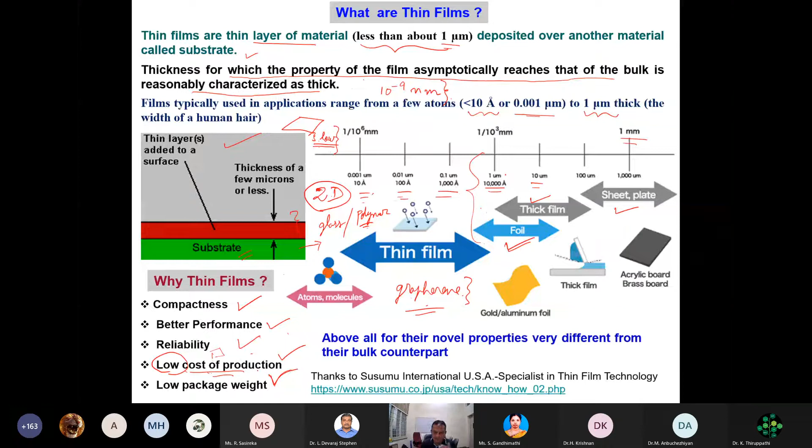For example, in your SIM card, I cannot have 2 mm thick gold. That means your SIM card becomes expensive, and people will try to pickpocket your SIM card also. So you have to have a low cost of production. So I should have a very thin layer of gold, but still it will serve our purpose. So in that manner it's called low cost of production, and obviously low packaging, because the thickness of the material is going to be scaled down. So the whole device will be very lightweight.

Okay. Now coming to how to form thin films. Can I melt it and cast it, or should I make it layer by layer? Several questions will come to mind. So there are 3 basic steps to form a thin film by physical vapor deposition, called PVD, or chemical vapor deposition, called CVD. You have to create the material in vapor form, then transport the material from the source towards the substrate, and then the film has to grow.

Why do we have to create the vapor? We will have a bulk material in our hand, so we create vapors by heating this material, and these vapors have to be reformed onto a substrate to the thickness we need for our application. So we create a vapor, transport it effectively towards a substrate, maybe a glass or something like that, and then grow it with a particular thickness and a particular property of interest onto the substrate.

So these 3 things are fundamental. Creation of the material in vapor form, by a chemical method or a physical method. Then you have to effectively transport the created vapors to the substrate, and then reform that material onto the substrate. So some of the steps for film formation are shown here.

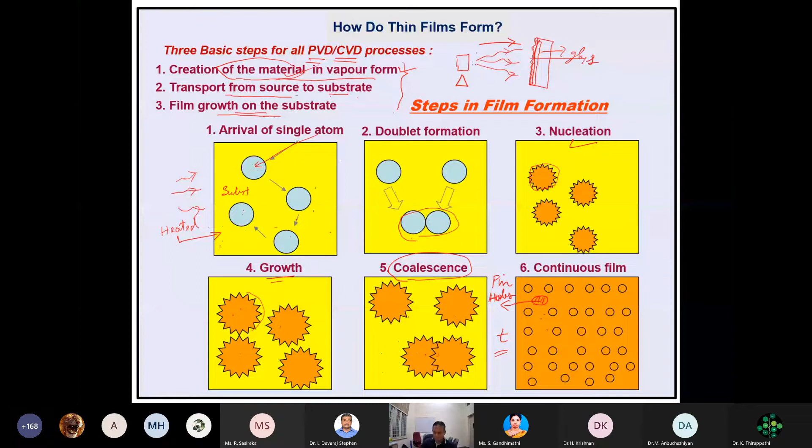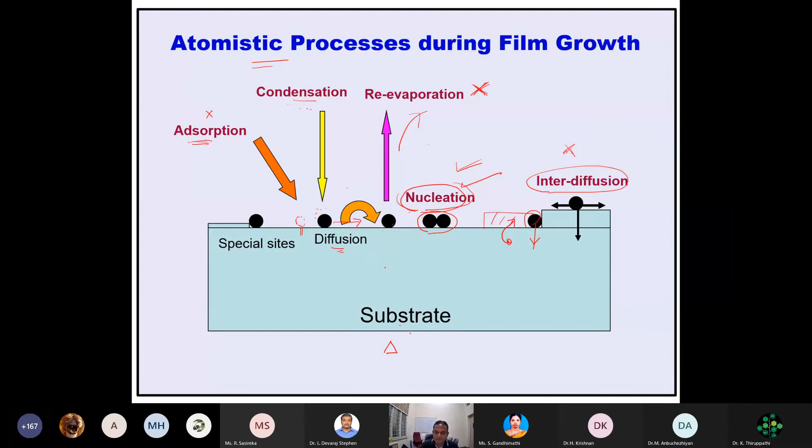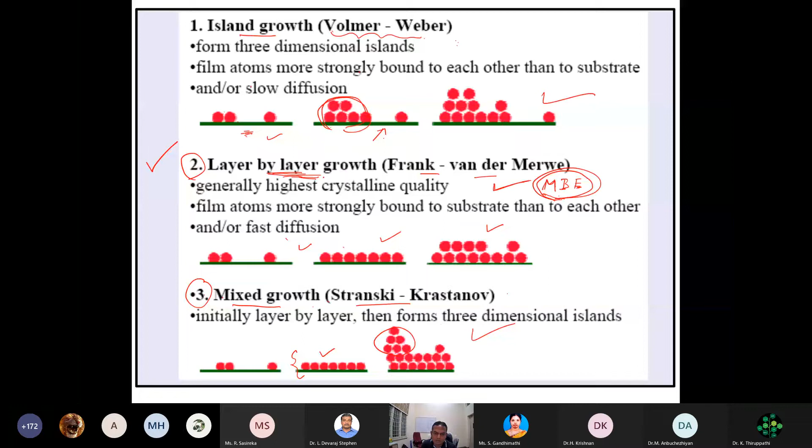So something like island growth mode or mixed growth mode, you will be ending up. If I want to have a layer by layer growth mode, to have an epitaxial film growth, I have to keep my rate of deposition very slow. But of course, it takes long time to deposit. But if you want to have a quality thin film, your rate of deposition should be very low. Okay, that is very, very important.

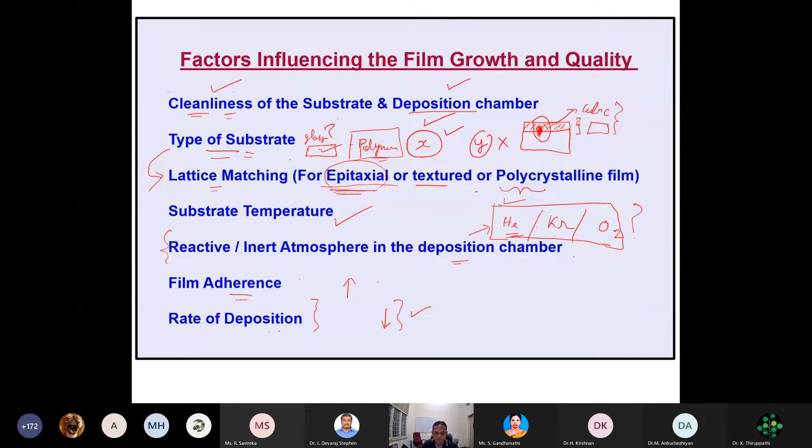And then coming to the cleaning process, how to clean the substrate. So first of all, you should decide what is a substrate, whether it is a glass or whether it is a polymer. Okay, so if it is a polymeric material, if I use strong acids, the substrate will be dissolved out. Okay, that should not happen. Or if I have a glass substrate, once again, I should not use a very much corrosive substance. If I use a very much corrosive substance, the surface will be etched out, and then the growth of the film may not happen properly.

So the substrate cleaning is not universal. You have to clean, but what are the steps to use for cleaning will vary depending upon what is your material or what is your substrate, all those things. So for now, I have given some set of procedure to clean that one. So you can see here, first I can take my glass substrate, put it in an ultrasonicator, okay, in a proper solvent in a container.

That is very important, because why I have to use an ultrasonicator means ultrasonicators will have frequency of the order of 20 kilohertz, right? So when they have 20 kilohertz frequency, you will see that at the bottom you will have a PZT crystal. Piezoelectric crystal will be there at the bottom. So when I'm going to oscillate this piezoelectric crystal at a very higher frequency in the range of ultrasound waves, you will see that inside this beaker where I have put my substrate along with a solvent, I cannot put it empty. I have to put some solvent here. So it will be creating bubbles. It will be creating a lot of bubbles at a rapid rate, of the order of ultrasonic frequency.

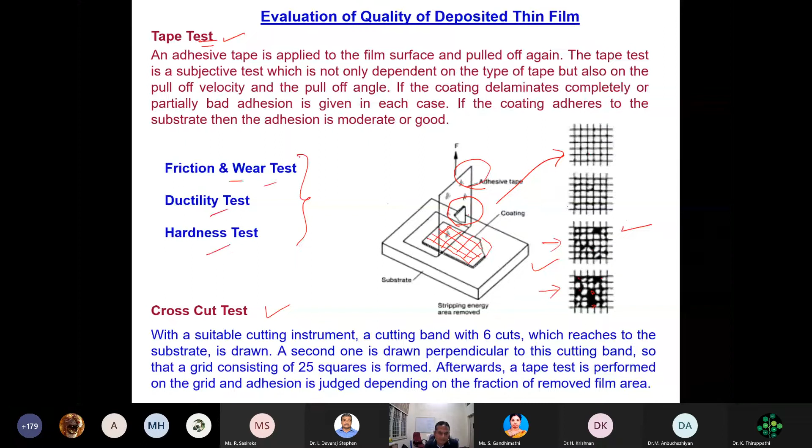Remember that this is a qualitative test because it depends upon the adhesive property of the tape and how fast you are pulling it. This is only a crude way of testing. Apart from this cross-cut test, we can do a lot of mechanical tests like friction, wear, ductility, hardness. So many things are there. Using a nano indenter or nano tribometer, we can do that.

Likewise, I can also do a scratch test. I can put a sharp tip on the surface and make a scratch. If it is scratching very easily, then the adherence is not going to be good. So I can test the adhesion strength by using a scratch test also. All these things are already available in a nano indentation test.

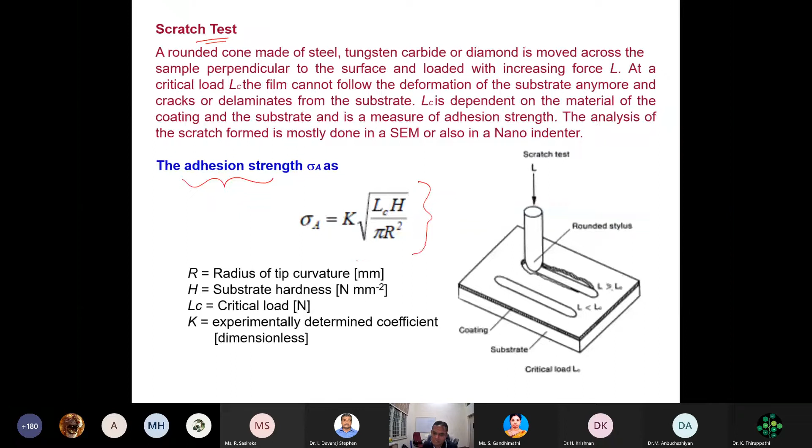The next one is a very important parameter called thickness, because the thickness of the film will tell you whether it is a thin film or a thick film. Obviously I have to study the thickness of the film, because the film thickness will determine the property of your material. If it is an electrical material or an optical material, thickness dependency is very important. So I have to measure the thickness of my film very accurately.

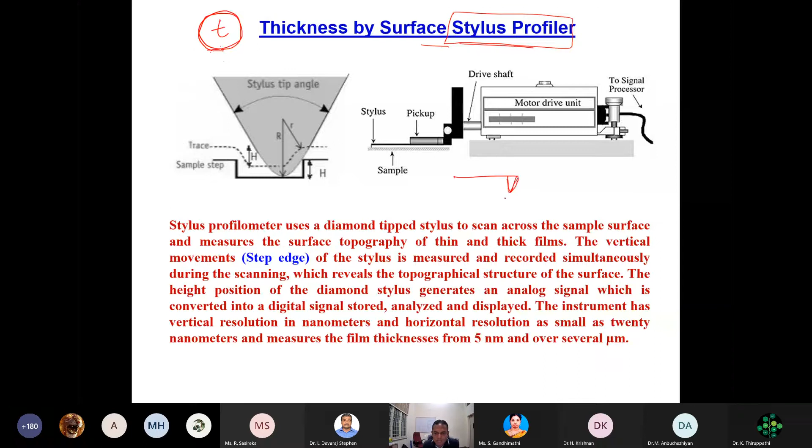The simplest one is called a surface stylus profiler. It will have a cantilever with a sharp tip like this. I can scribe this cantilever on the surface of the step edge. I think there is a clear picture here.

Now you evaporate the material and coat this substrate. Coating will happen on the substrate surface and also on your tape. After coating is done, you remove the tape or knife edge. Ultimately your film will look like this: your film will be here and this will be the uncoated area. So there is a step, called a step edge.

If you want to use a stylus profiler, you are supposed to coat the material with this step edge. Then I can put a stylus with a sharp tip, scribing from the substrate. When it comes here, it looks like a step. The tip will climb over it because it's a cantilever and can move freely. So it will climb over the step.

So I can use some software and then I can make this as a flat one. And then I can take the difference between these two. By using laser measurement techniques, I can precisely measure how much this cantilever has moved up. The difference will give me the thickness here.

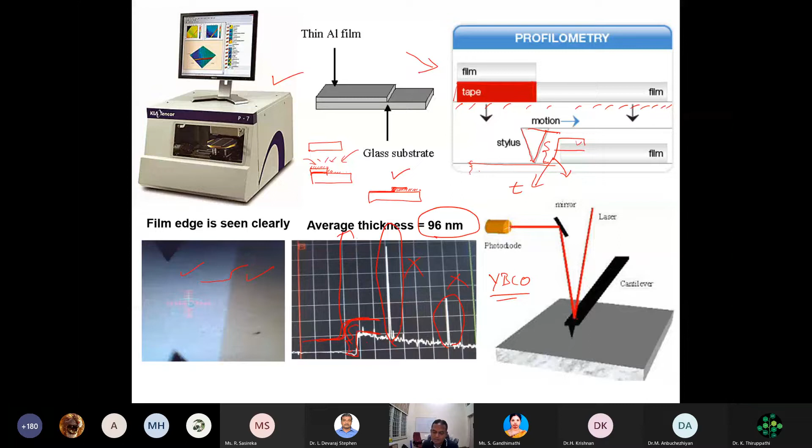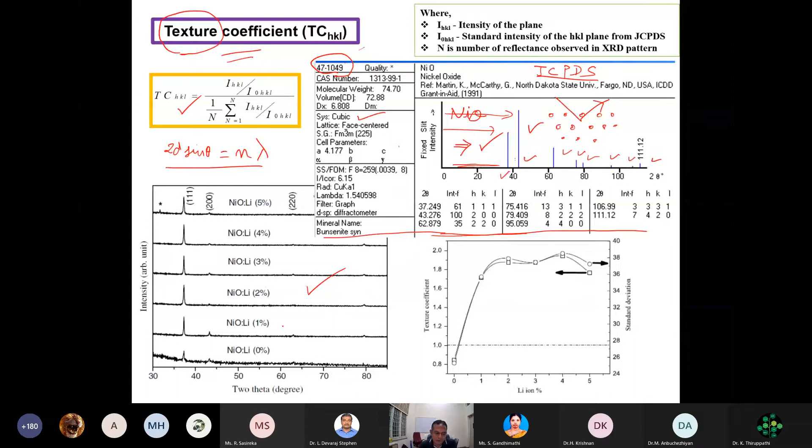Okay, to calculate textured growth, we use a formula called the texture coefficient formula. This texture coefficient formula will involve the intensity from the pattern onto our film. So now this is a standard material. This is my film, which I have deposited using a spray pyrolysis technique. Now, if the same cubic structure is found in my material, how to identify that? So I have to take a pattern for my different films, identify the location of my 2 theta and the intensity, and then compare whether this position and intensity are matching.

Okay, but you see here in this nickel oxide standard pattern, the highest intensity peak is around 43.2 degree, 100%. So this is the 100% peak. Whereas this is the second higher intensity peak. Then this is the third one, but the intensities are not matching. You see here in my pattern for thin films, the 37.2 degree peak is higher, whereas the actual 100 intensity peak is lesser. Okay, so this doesn't mean that the compound has not formed on my substrate. That's why thin film diffraction patterns are sometimes a little bit tricky.

What will happen here is, if I have a diffraction pattern, say for example, if I have particles sitting in all possible orientations, HKL planes, then when I do a diffraction pattern, this kind of pattern will come. But because of the growth procedure which is happening in this material, you will see that all the particles will not have a random orientation. They have some kind of preferred orientation in only one direction or two directions. They may be sitting like this uniformly, and the thickness is very, very thin.

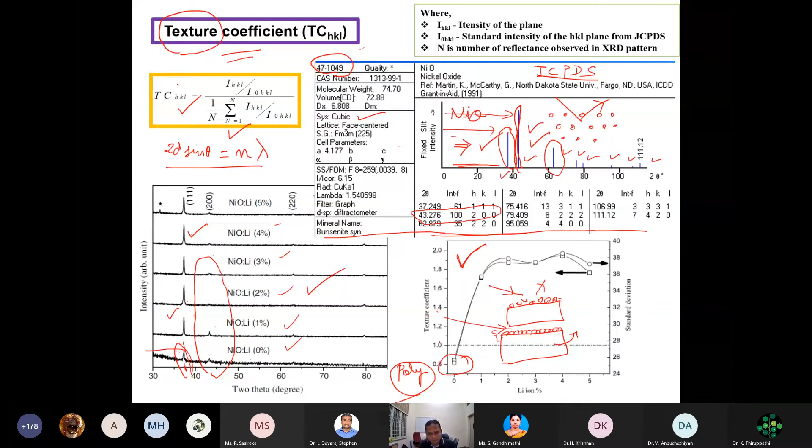Suppose your texture coefficient is more than 1, like 1.4 or 2 or 3, then it is a textured growth. So this is very important for thin films. Most of the time, thin film patterns, unless it is a polycrystalline thin film, your X-ray diffraction pattern may not match with the polycrystalline X-ray diffraction standards. So you have to see whether it is having some textured growth. This is very important. And next one is sheet resistance.

So we can measure the sheet resistance by this 4 probe, and then I can calculate what is the sheet resistance for my material. Why I am telling this one is, for a bulk material like a piece of copper which is very thick, I can use my formula as rho equals RA by L. So R is the resistance, A is the area, L is the thickness, or T, whatever it is. That will give me my rho.

So if I take a linear 4 probe, I will apply a current between the probes 1 and 4 and measure the voltage drop between the probes 2 and 3 on the surface of my copper. Suppose this copper is, say for example, 2 mm thickness. 2 mm thickness is very thick, you can handle it very easily. And the probe spacing will be around 1 mm. So if it is 1 mm, you see that the material thickness is much larger than the probe spacing. So it will have a different current path.

Whereas in the case of thin films, we are dealing with a very, very thin film. On the substrate, the film will be of the order of say 100 nanometers. 1 nanometer is 10 power minus 9 meter. Whereas the probe spacing which you are keeping to measure the resistance will be 1 millimeter, which is much, much larger compared to 100 nanometers. In this case, the standard formula for measuring the sheet resistance or the resistivity will not be valid, because the current path taken in this particular case will be very different.

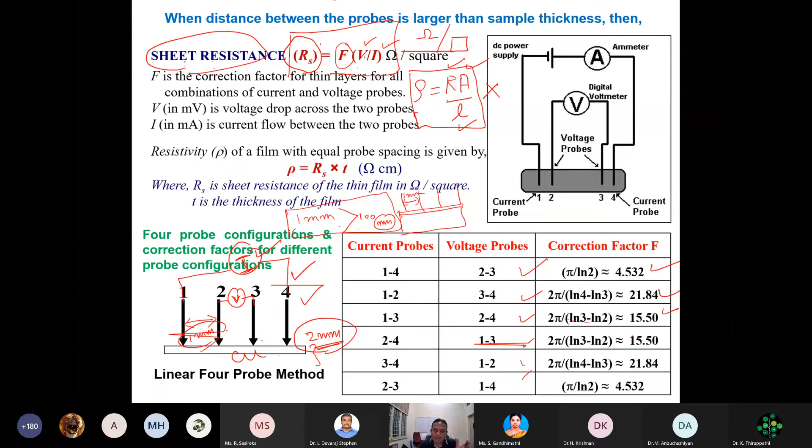You know that the unit for resistance is ohm, whereas here the sheet resistance is ohm per square. So most of the time it is given as ohm per square like this. Square in the sense of a square area. It can be 1 centimeter square, 2 centimeter square, 5 centimeter square like that. That's the notation here. So the resistivity will be your sheet resistance into thickness.

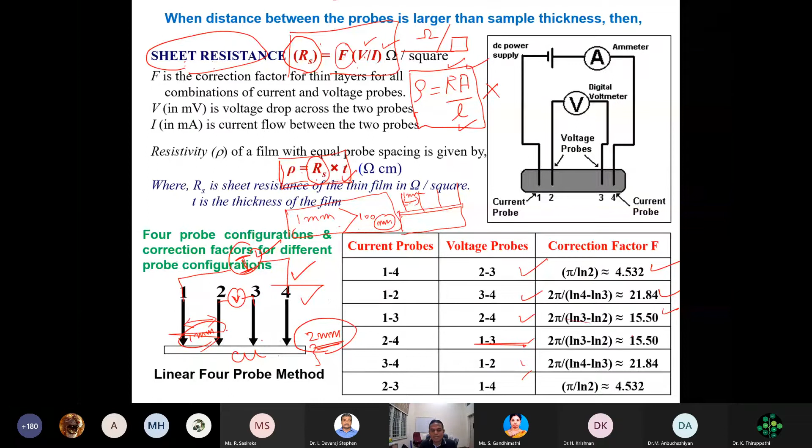You see that this formula is also changing here. So it's not a conventional material because the thickness is very small, of the order of nanometers. You will see that the probe spacing is much larger. So the resistivity will be Rs into T. T is the film thickness, Rs is the sheet resistance. Okay, so this is very important.

Then coming to the electromagnetic radiation. Okay, so up to this it is basics of thin film. Now I will speed up a little bit and then I will tell you what is a transparent conducting electrode, and then I will give some of the results of my tantalum doped tin oxide. So you know that this is a familiar picture showing the visible radiation.

So you will see that metals are all opaque. Copper, gold are all opaque because electromagnetic radiation cannot pass through this particular metal. They just get reflected off this particular metal because electrons are more in the case of metals. So free carrier absorption will be there. All your incident electromagnetic radiation will be absorbed by the free carriers.

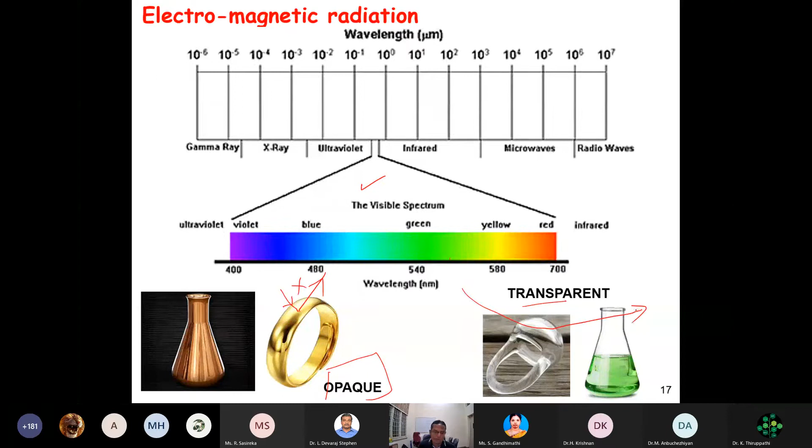Whereas when you come to a glass or a semiconductor with a wide band gap, you will see that they have sufficient band gap and less number of carriers. So obviously the electromagnetic radiation can pass through the glass medium or sometimes semiconductor medium. Okay, this is very important. With this idea, we will go into the concept. What is a transparent conducting oxide?

Okay, so now you recall the touch screen of your device. Whatever the mobile phone or touch screen laptop you are having, when you are touching, there is a signal carried. So how is this signal carried? That means there should be something happening there. Some change should be happening there. And you see that your screen will be divided into different locations. Your click button will be appearing in different locations. The entire screen should have some sensor there.

So that sensor should be conducting. Then only a signal will be carried. At the same time, it should also be transparent. Then only the light coming from your display device, LED or OLED kind of thing, will reach your eye. Okay, that is a very important part here. So the material which is on your screen should be both transparent and also conducting.

Whereas by Maxwell's equations, you will see that metals are going to be opaque, and glass will be actually highly resistant. So you cannot have both the functions in the same material. Maxwell's equations limit that. But there is a set of materials which can have these two contradicting properties coexisting in the same material. So those materials are called transparent conducting oxides or transparent conducting electrodes.

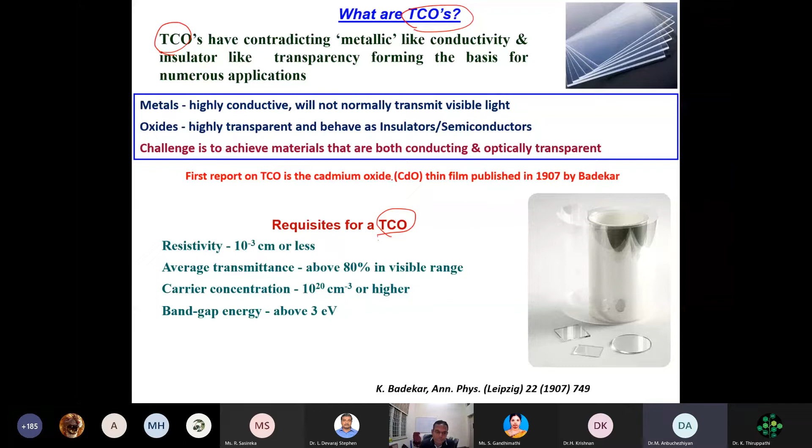Okay, so to achieve these two properties in the same material, it's going to be a little bit challenging. So you will see that these materials are called TCOs. So what are the properties or requirements for having a transparent conducting oxide? For example, the first one is cadmium oxide, reported in 1907 by a German physicist, Badekar. But this is toxic. Cadmium oxide is very much toxic, so you cannot commercialize it.

It's a carcinogenic material. So people will go for non-toxic materials because now we are using all these TCOs very widely. When you see the resistivity, it will be of the order of 10 power minus 3 ohm centimeter or less. Transmittance should be more than 80%. Otherwise, your display will not be very bright. And carrier concentration for conductivity should be of the order of 10 power 20 per centimeter cube. That means it should be almost like a metal.

Metals have this much carrier concentration, but they are not transparent. Whereas your glass material will have high transparency, but its carrier concentration is very, very low. That is the problem here. So we should look for a material which has a very wide band gap so that I can improve the transparency. Also, I should have a higher conductivity.

Now, let us see a classification of applications. For example, if you want to use these transparent conducting oxides or electrodes for solar cell application, where there is power trapping from the incident photons, I should have very low sheet resistance, of the order of 5 ohm per square. Or if I want to use it on an OLED, like OLED TVs, I should have around 100 to 200 ohm per square, depending upon the manufacturer. Likewise, if I want to use it for a touchscreen application, then the resistance can be slightly higher.

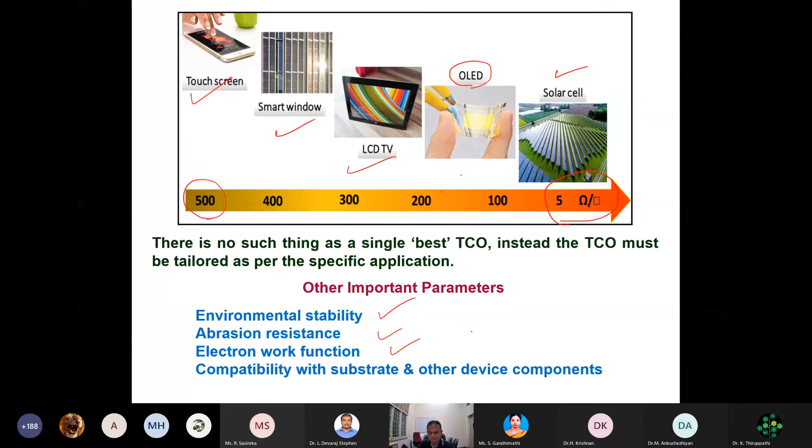Whereas for capacitive switching, you can recall a capacitor: you will have two parallel electrodes with an insulator or a dielectric medium in between. The capacitance depends upon the distance d between the electrodes. So we can make a capacitive touchscreen device where the bottom and top conducting electrodes have a small gap.

So when you touch it, a small variation in the distance will happen. This capacitance variation is enough to give a signal to your processor, an on signal or off signal. This capacitive switching is what is mostly used in mobile phone touch screens. So obviously, at least the bottom electrode should be conducting.

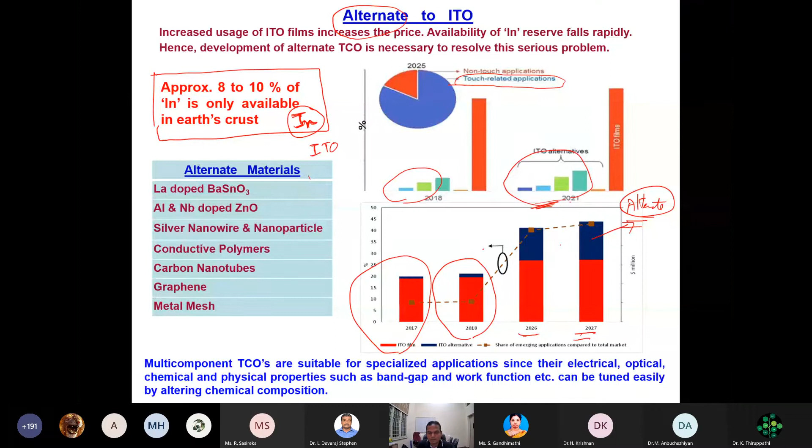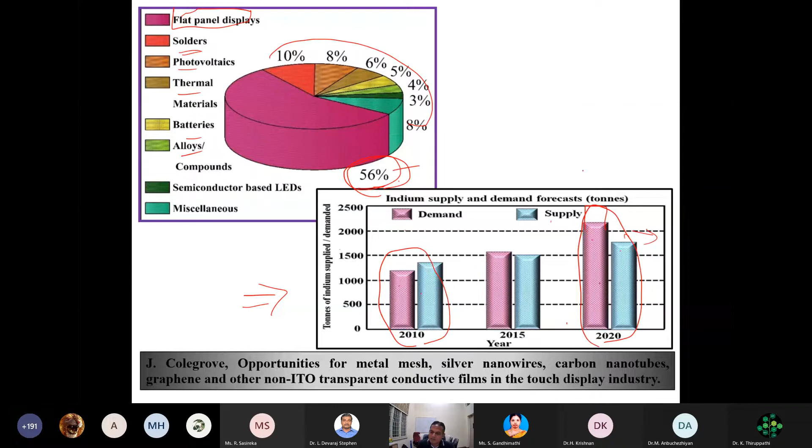In this material forecast, you see the tons of indium supply and demand. The red or pink color is demand. In 2010, supply was more than demand. In the prediction for 2020, demand is more than supply. I think this data has to be revised because nobody expected this pandemic; demand may be much more than the supply. In forthcoming years, demand will be very high and supply very low. So we are forced to look for alternate materials.

So what are the alternate materials available in the literature? There are too many materials; I'm not going to touch all of them. Let me tell you only one: tin oxide. Tin oxide is a very cheap material, and it is an n-type material most of the time. There are different dopants I can put into tin oxide: I can substitute some part of tin with antimony, niobium or tantalum, which will give free carriers, electrons, to the system.

SnO2 is already a wide band gap semiconductor, so transparency is not a problem in tin oxide. Only conductivity is a problem. To improve the conductivity, we can put some donors into the material, like in silicon where you dope with donor elements. So antimony, tantalum and niobium are donors in my tin oxide material.

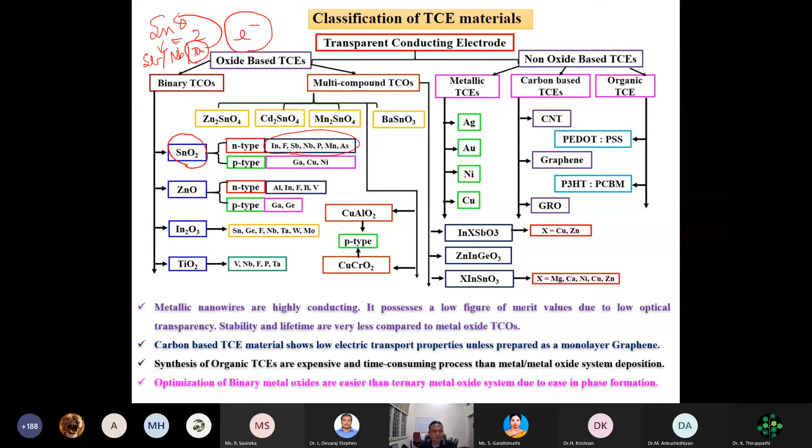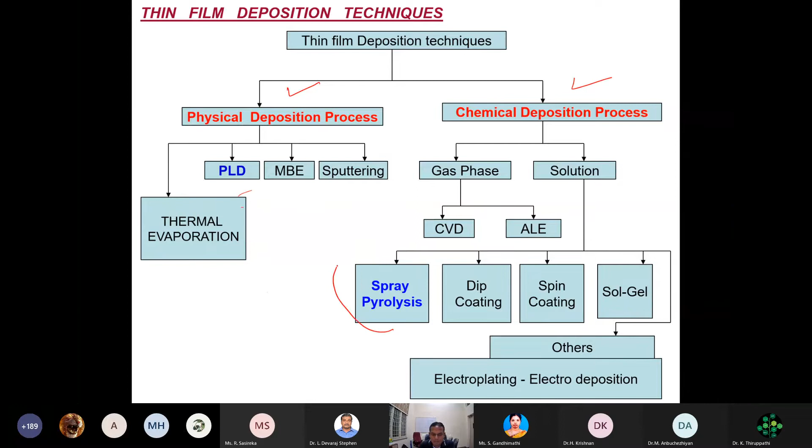The simplest example is a perfume bottle. When you press the perfume, as in a lot of advertisements, fog is happening. That means very fine aerosols are emitted from your perfume bottle. Aerosols are a kind of mixture of gas and fine particles.

So whatever material you are going to come out as an aerosol, this is very, very fine, small droplets. What you do, you put a heated substrate here. You put a heater here, put a glass piece there at a high temperature, say for example, 300 degrees centigrade. You use a perfume bottle, take your tin chloride, SnCl2, say for example. You spray it. So along with the air molecules, your SnCl2 will be sprayed onto this one.

The moment it is very, very fine droplets, you will see that this temperature will disintegrate this chemical, and then it forms SnO2. That's called pyrolysis. Pyro means temperature. So in pyrolysis, you will see that this tin chloride will be disintegrated. Chlorine will be removed as a gas. It goes outside, and then tin, along with air or oxygen in the air, will form an SnO2 layer onto the substrate. This is the simplest spray pyrolysis which we can tell you.

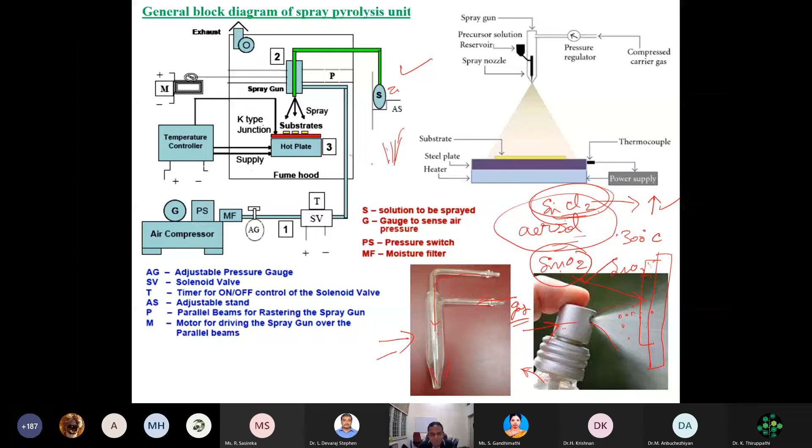So this end is tapered, this tip is going to be very much tapered with a double gun. So due to Bernoulli's principle, there is going to be a lot of pressure difference and you will create aerosol coming out of the system. So this aerosol will be projected onto the heated substrate and then it will dissociate into oxide molecules and form an oxide layer here. And the extruded gas, I can put the exhaust and then pump it out slowly. Okay, so these are all the controls to turn the system on and off. So this is called a spray pyrolysis unit.

Okay, so using this technique, we have prepared a tantalum doped tin oxide. That is the method. Now we come to the material. So when I put tantalum here, you see that tantalum mostly stays in a 5+ charge state. Whereas when I take SnO2, Sn will be in 4+ charge state because oxygen will have 2-. There are 2 units of oxygen, so it will be 4-. So Sn should be in 4+ state.

When I put tantalum in 5+ charge state, when I put tantalum oxide here, tantalum will use 4 electrons to bind with oxygen, and 1 electron will be left free. This electron will be donated to the lattice, and we can improve the conductivity of tin oxide. So what we are doing in this work is putting different concentrations of tantalum into tin oxide, and trying to see which combination is best for our transparent conducting oxide application. And then we also tested this as a counter electrode for making a solar cell.

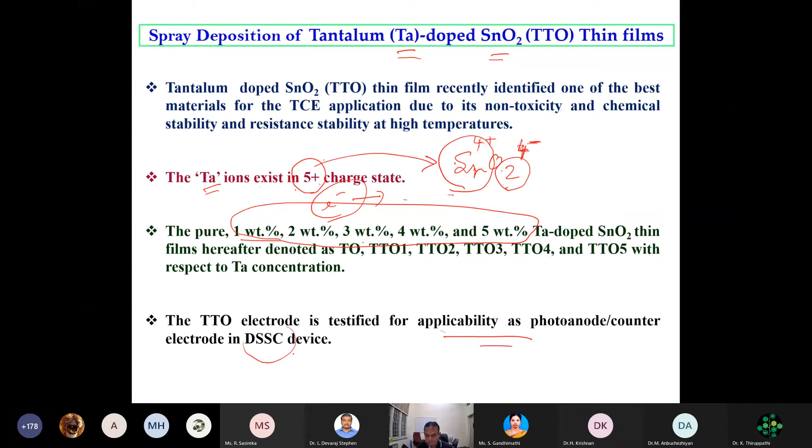Okay, so now I will slightly speed up. I won't go into much detail on the data because time is also limited. So this is the unit which I showed you. All those things are in this region inside this cabinet, and I will have my heater here. This is the heater, my substrate I will put here, and my gun will be somewhere here. You see that the height between the gun and the substrate is very, very important.

Okay, I will project this table here once again. You can see these are all the control parameters associated with the spray pyrolysis technique. The starting material is important because it should have a low decomposition point, and the solvent you are putting is also very important. And then the substrate you are using, substrate temperature, carrier gas, pressure of the gas you are using to create vapors or the aerosol of this particular solution.

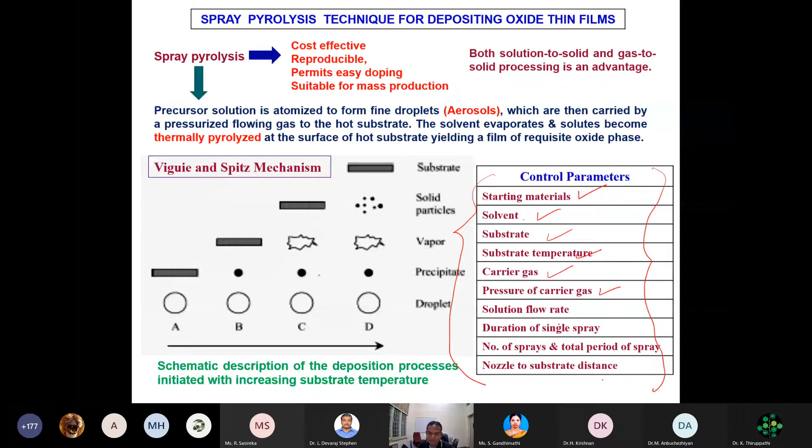And then when I spray this solution along with the compressed gas here, this solution along with the compressed gas will cool the substrate. Say for example, when I keep 400 degrees centigrade, when I spray once, the temperature will come to almost 325 degrees centigrade. So I have to have an idea about the distance and the pressure and this cooling temperature. Because I have to spray this aerosol so that it reaches the temperature where its decomposition point is satisfied.

If the cooling is too much, if it goes to 200 degrees centigrade, nothing will happen, because your tin chloride material needs nearly 300 degrees centigrade for decomposition and forming a film. If the temperature is cooled off to 200 degrees centigrade, it will not decompose. So you won't have tin oxide material there. Instead of that, you will simply have tin chloride only sprayed onto the substrate. So this cooling effect has to be taken care of.

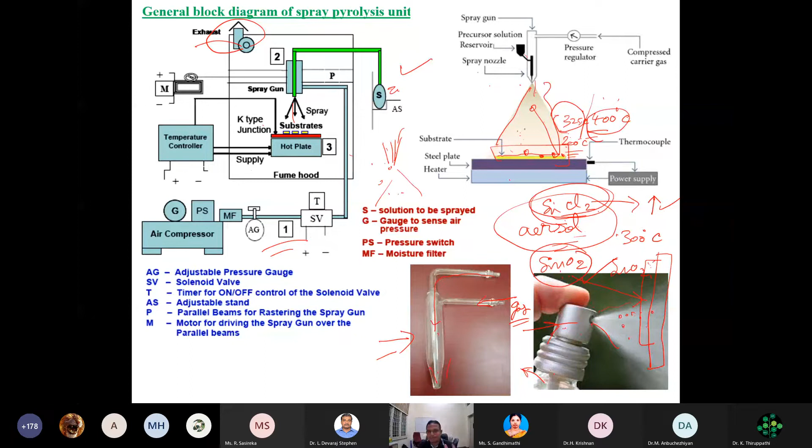And not only that, I cannot spray it continuously. If I spray continuously, what will happen? The temperature will come to 100 degrees centigrade and nothing will happen there. So what I have to do is spray for a moment and then wait for some time, like 30 seconds to 1 minute. The temperature has to come back to 400 degrees centigrade. Only then can I maintain the decomposition temperature for tin oxide. That is the condition which is given here.

So I will be spraying for 0.5 seconds. Just a moment only I will spray. That aerosol will come to the substrate and that itself will cool my substrate nearly 75 to 100 degrees centigrade. So I have to wait for 30 seconds for the heater to supply heat and regain the temperature. Only then can I maintain the temperature suitable for my decomposition. So these are the conditions.

Why? Because this particular direction orientation is called anisotropy. This is a directional dependent property. The electrical and optical properties are all dependent upon the crystallographic direction of a material. So if I have a better property along this direction, I can adjust the parameters and try to grow only along this particular direction. That is why measuring this texture coefficient is very important, apart from identifying the phase formation, because I want to have only SnO2.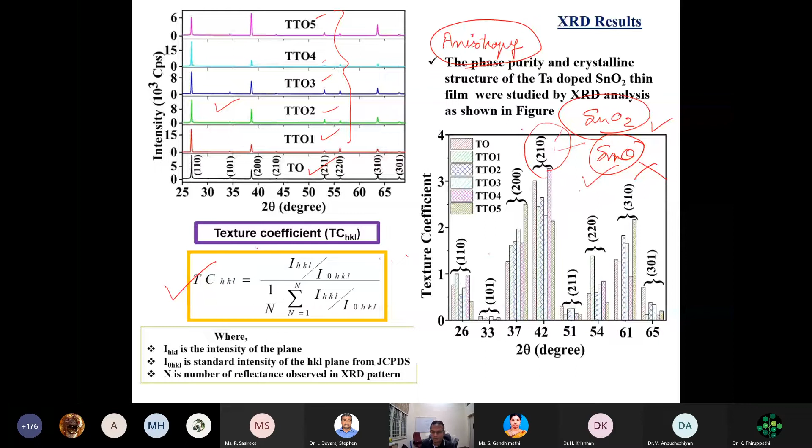Sometimes if my preparation condition is not good, it may form SnO, which is sometimes an unstable phase. I don't want this one, I want only this one. So to confirm the phase, they have to do X-ray diffraction, also to find the texture coefficient. And then we used X-ray photoelectron spectroscopy to identify the charge state. This shows that tantalum is in a 5+ charge state. So obviously it is going to be conducting.

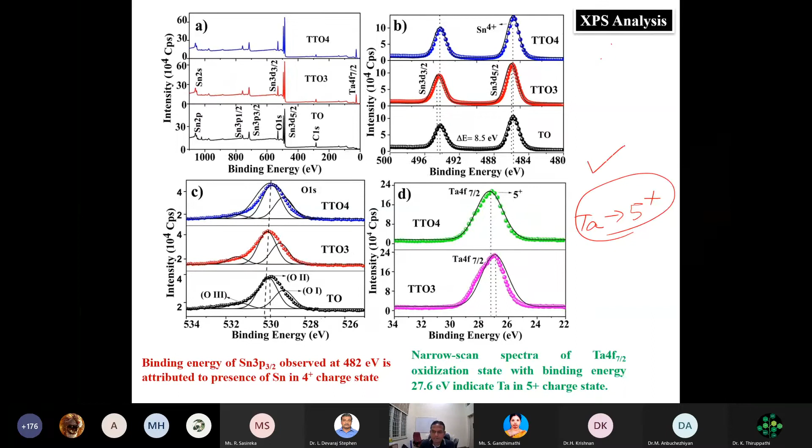Because it's spray pyrolysis, if you don't maintain the preparation parameters properly, sometimes these vapors will go out of the system. They may not even fall on the substrate. So the tantalum content may not be there inside the film to the expected level. So it is important to identify whether the percentage of tantalum is there or not.

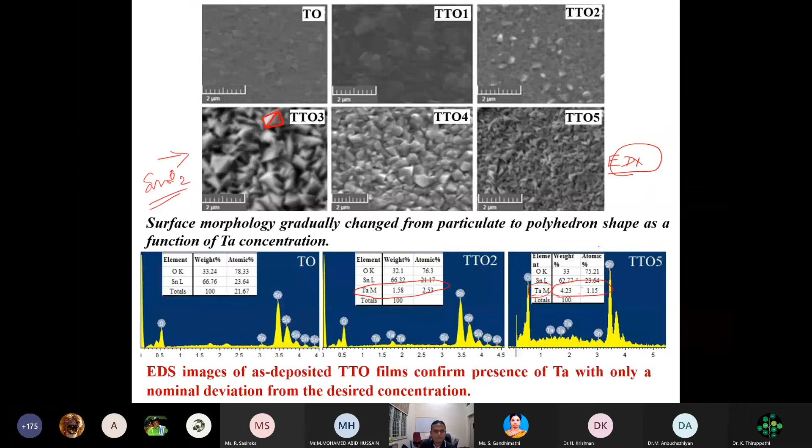Then we can use a formula to estimate the band gap, called the Tauc relation. Using the Tauc relation, we can calculate the band gap of the material and how it varies as a function of dopant concentration. Then we can measure the sheet resistance and resistivity using the formula which I told you. Also, we can use the Hall effect.

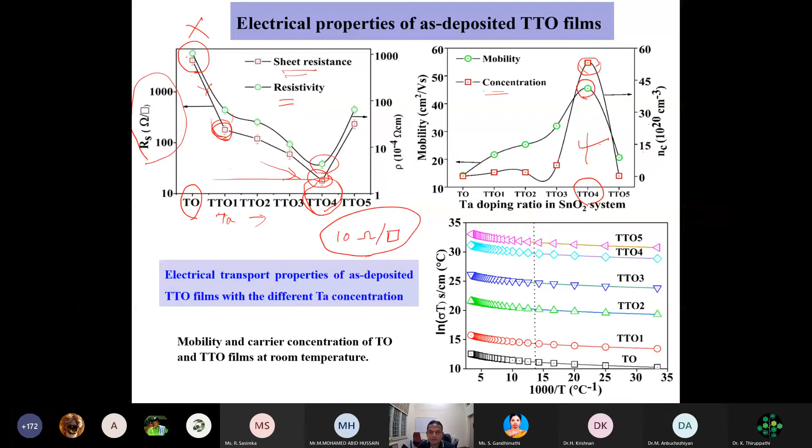Okay, so we can further explore this 4% tantalum doped material for our alternative TCOs. You can see here the sheet resistance is around 18 ohm per square, and 18 ohm per square is really good. Whereas the surface work function is not as good as indium tin oxide. Indium tin oxide is the best one.

I cannot claim this tantalum doped tin oxide as a complete substitute for ITO. But depending upon the sheet resistance needed for different applications, we can try to use these alternate materials and reduce the quantity of ITO used in the market. You can use ITO only for essential purposes where it is really needed. Otherwise, in some other applications, I can use these alternate materials to supplement it.

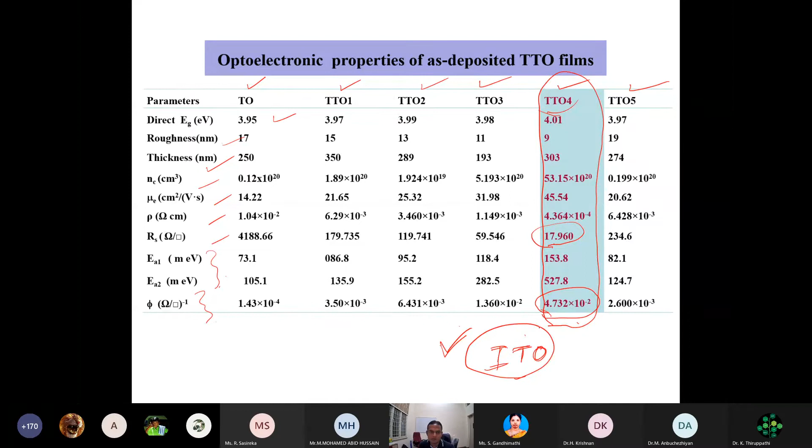Okay. We also tested the temperature stability as a function of annealing duration and temperature. We increased the temperature from 200 to 450 degrees centigrade for about half an hour or 1 hour, and measured the sheet resistance again. As a function of temperature, sheet resistance decreases up to 400 degrees centigrade. Above 450 degrees centigrade after deposition, sheet resistance increases in all the cases.

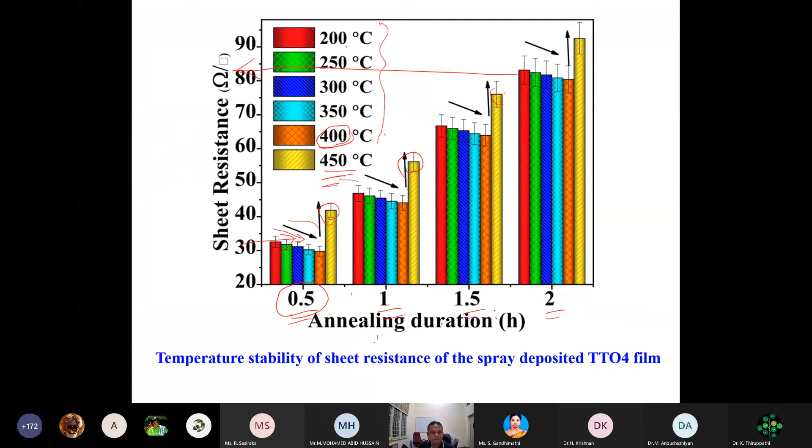So obviously it is less than the standard one, but still, as an alternate material which is explored with lesser impact, this efficiency is not very bad at all, because it's 5.5 for standard, and it's coming to 3.26. So if you alter several other parameters, you can definitely improve the efficiency of this TTO.

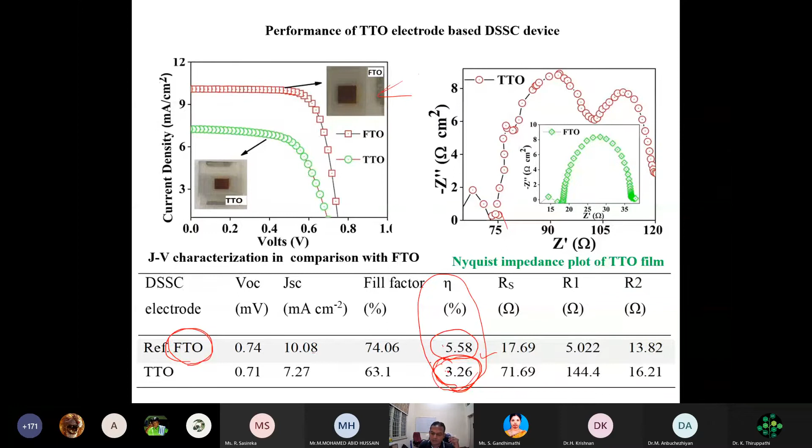So these values prove that the TCO has transmittance around 86%, which is good for a TCO. Also the sheet resistance is very good, and this is for a particular green color wavelength, which is an average wavelength for visible radiation. It is good, and temperature stability is also 400 degrees centigrade, whereas your FTO will have a temperature stability around 500 degrees centigrade.

Because of this, you are having a higher efficiency there, because the layers will be formed properly when you make a device, whereas the annealing temperature is lesser for this particular sample. So we have to see how we can improve this temperature stability so that it can be on par with commercially available FTO. And DSSC is showing 3.26% efficiency, and the surface work function is 5.08 electron volt.

This is not as good as ITO, because nothing can match ITO, but still it is not bad. It is really an appreciable value for device applications. Okay, so with this I conclude, and thank you for listening.